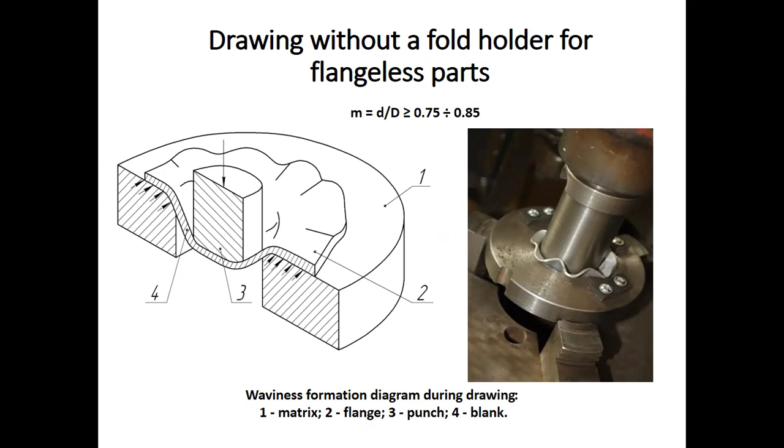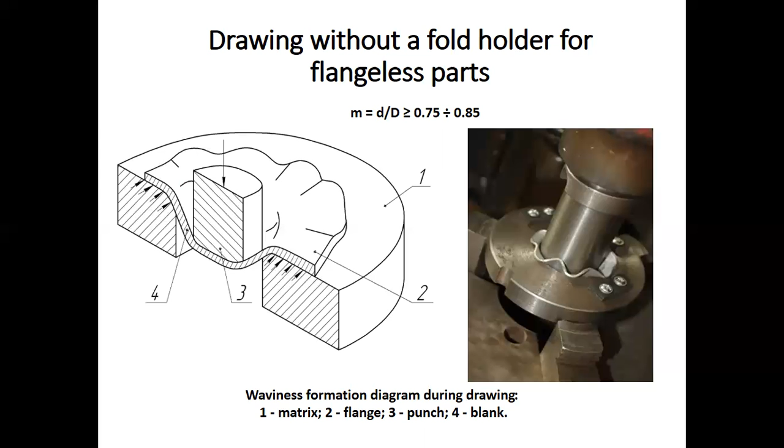Moreover, parts made of plastic metals and alloys with a large flange can be drawn without noticeable signs of corrugation without pressing, only to a shallow depth, h equal to 3 to 6 s. High values of h correspond to workpieces with big thickness. Drawing without pressing parts with a big flange is only possible before the start of decreasing the size of the initial workpiece. To test the possibility of obtaining high-quality cylindrical parts by drawing without pressing the flange, experimental research was carried out on round workpieces of various diameters and thicknesses.

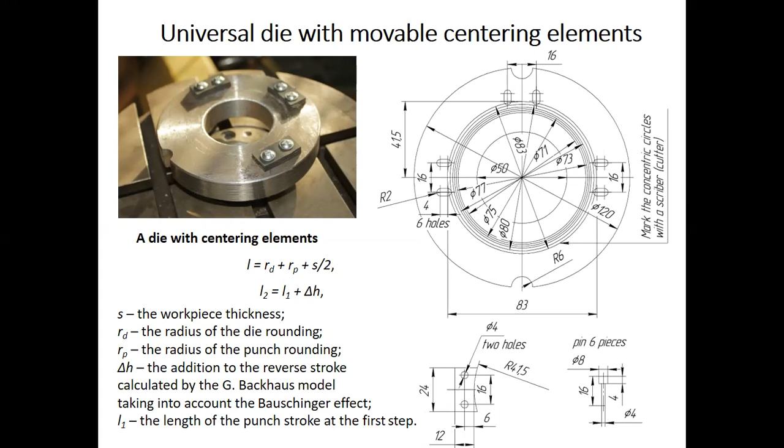The process of drawing without a blank holder is accompanied by the difficulty of centering the workpiece on the die, and as a result, unilateral drawing of the semi-finished product, the appearance of primitive faults and disruption of the location of strain, and these processes are aggravated when using the same die for workpieces of different diameters. Therefore, to conduct the experiments, a universal die with movable centering elements was designed, with the help of which the workpiece was accurately aligned with the hole of the die and punch.

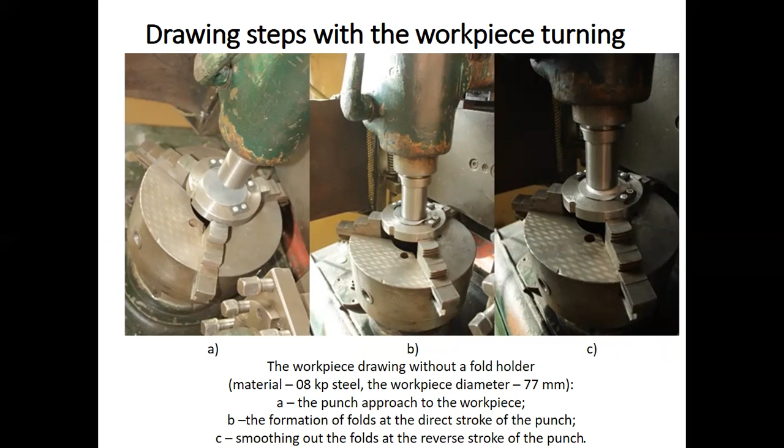Here, the clamps move along the radial grooves simultaneously and synchronously with each other to the center or from the center of the die, which ensures self-centering of the workpiece. After the first stage of drawing passed, the semi-finished product with corrugation was removed from the die, turned by 180 degrees and reinstalled. It was centered with the use of moving elements.

The stroke of the punch was turned and the semi-finished product was deformed until the corrugations of the flange were smoothed out. The punch was stopped and it was given a precisely calculated stroke until a new formation of folds of incipient curvature on the flange. The length of the reverse stroke of the punch was calculated by mathematical dependence. Then the semi-finished product was removed from the die, turned over by 180 degrees, and the process was repeated until the desired product height was obtained.

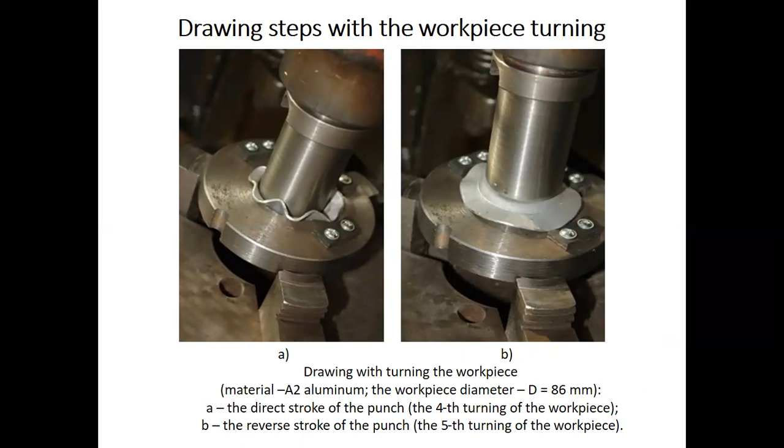The larger the diameter and the smaller the drawing coefficient, the greater number of turnings is necessary to obtain a normal part. Aluminum is a more ductile metal in this case. In comparison with steel, it requires a smaller number of steps with the same initial parameters and drawing coefficient. However, the thickness of the workpiece is higher for aluminum than for steel, which may explain the better stability of the workpiece flange and the possibility to obtain increased strain during one step.

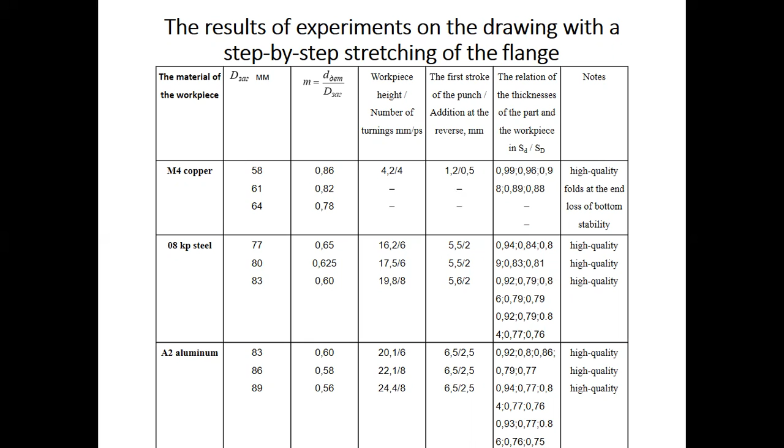Drawing of thin metal by this method is difficult because when the workpiece approaches the shape of the finished part, the corrugations are not completely smoothed out and remain on the product, which is unacceptable. Besides, the turning of the workpiece and the strain result in a loss of bottom stability in the form of local buckling of metal. It is shown in the table for copper workpieces whose thickness is 0.25 millimeters. Thus, the conducted experiments confirmed the possibility of manufacturing cylindrical parts by drawing without pressing the workpiece flange with its step-by-step stretching. Thank you for attention.